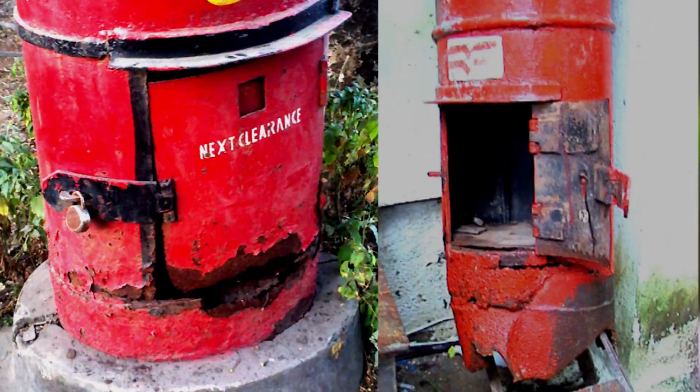The door was dangling. People would post letters and you would see a lot of letters from the outside. And I was saying, can't we just change one product in the country, having so many means in IIT? So we took this as a cause. So that's what we're coming down to. You take as a cause that you need to solve this problem and you have all the wherewithal to do this. So designing a maintenance-free post box became the single line brief.

So how this line brief came is very important. We also thought of doing this project. Who do I have to go to? The India Post, and then I requested one of my students to take this as a project. Luckily, one student agreed. He said, I'd like to do this project. The Postmaster General in Bombay also was very, very happy, and to his everlasting credit, he gave this one-line brief: maintenance-free letterbox. And you'll see how this is very important for the whole design journey.

So then from our side, the trigger was very critical. I had a concern for the post. I had the empathy for the user. The letters are getting spoiled and dirty. There was a strong urge to make a difference. Like, we're all designers here, can't we do one small product for the country? And then the conscience of the designer saying that usability and product features have to be very critical. So can't we change this? And generally designers have this dream that I need to do a product which will be seen all over the country. So it's part of that motive also.

So then comes our next thing. First the cause we've taken up. Now the context. Very, very challenging context. Look at the number of letters the people are sorting there. These letters are in the GPO, the General Post Office in Bombay, where they are sorting them for different regions. They are very skilled. They actually throw these letters and they just fall in the right bins, and then you sort them and take them out.

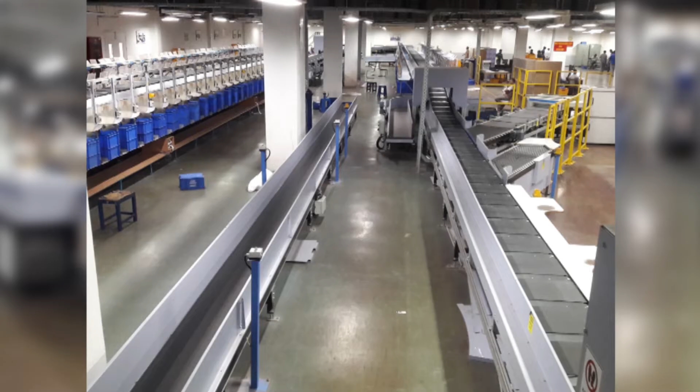While this is happening, they have a high-tech sorting machine too, which is an automatic machine which finishes off all the sorting with infrared coding. So in this context, there is this area which is manual sorting for letters which can't be infrared coded, and there is this high-tech machine which they bought for crores of rupees which does the sorting for most of the other letters which are infrared coded. So we have a dichotomy. There is a whole canvas from low-tech to very high-tech.

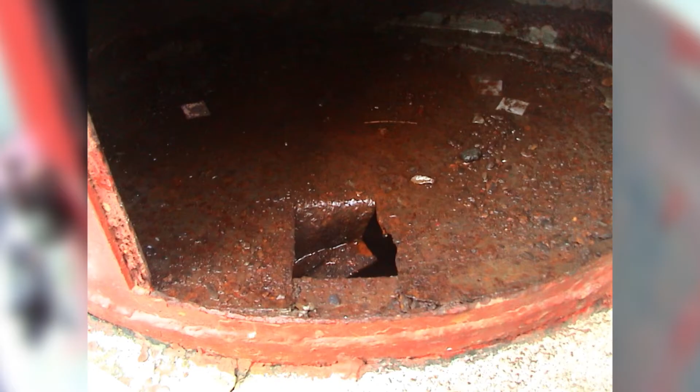And even the installation processes are very, very tough. So your installation costs are very high, the painting costs and the maintenance is very, very costly. So that also has very important bearing. And water ingress, look at this very ingenious postman. He actually put a gunny bag inside so that the letters don't get wet, because there's water on the floor. Look at the other person where he's put a small hole over there so the water goes and stays there rather than stay in the box. So these are all the conditions of the post boxes.

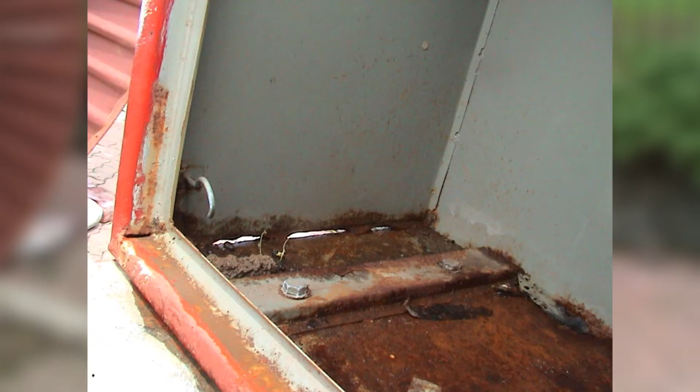And look at the manufacturing defects. Can you see that edge which is open on the side? So how do you manufacture? What are the details which you use for manufacture? So manufacturing plays a very vital role. So from each of these insights, we're getting new aspects.

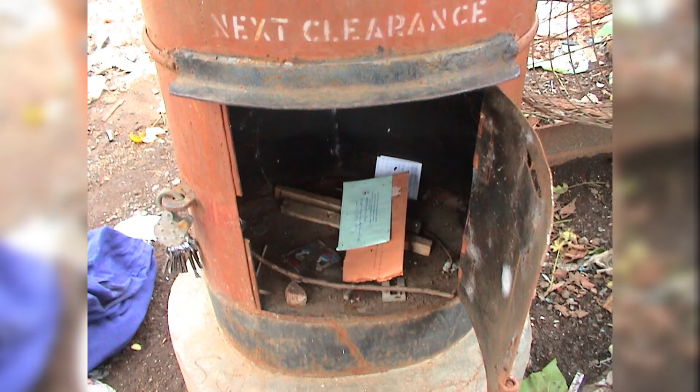And look at this again. Because the bottom is getting wet, the postman put a lot of sticks and wood so that when the letter falls, it falls on those sticks so that the letters don't get wet. And look at the other problem. People putting cigarettes and stones inside. How do you prevent that? You can prevent all this.

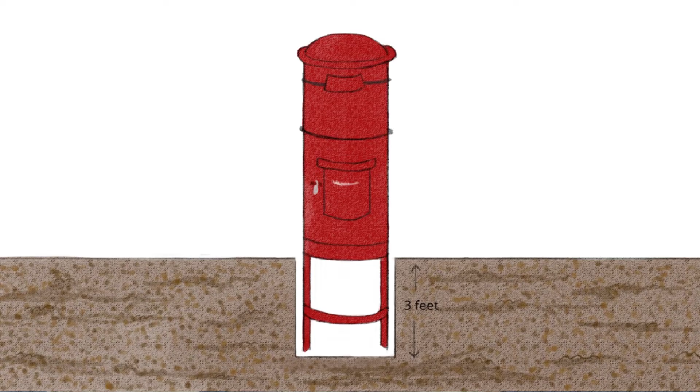Okay, and then look at the keys. You've got 10 keys and he's fiddling with the keys to open. So we need to reduce the number of keys if possible. You can have a common key. So most of the check is coming from your study.

And then he has to place the timeline, at what time he's clearing the letters and what is the next clearance tag. If he's cleared the letters at 3 o'clock, then he would come again at 3 next day. He has to say 3 next day, or he has to say 6 o'clock in the evening. So those clearance tags go into the post box. So we study those tags too.

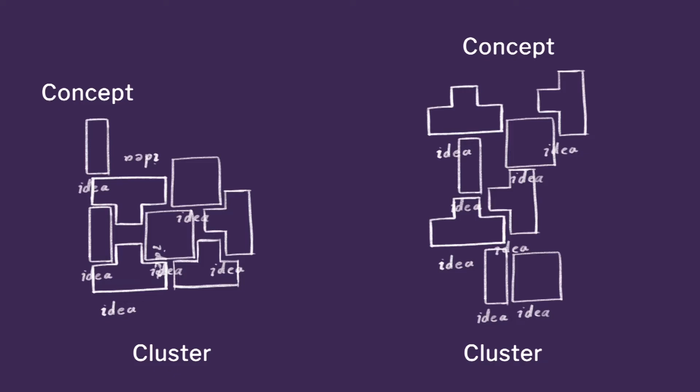So let us now go to the most important aspect of the lecture, which is the creation, the conception, where we're trying to conceive multiple ideas. We group them into affinity clusters. We'll explain each of these terms to you one by one. We create at least 3 concepts for every project we have. 3 concepts are a must, and then we select the final design. So in this sequence, when you have multiple ideas and make affinity clusters, you have around 30 ideas in each cluster. Then when you make concepts, you have one assimilated concept, and then you design. So this is a very interesting journey.

This needs specialized training. So now I've put up this slide specifically for you, and you can see that there are multiple ideas for each problem, but I'm only showing you 1 or 2 ideas for each problem. You can actually have 10 ideas for each problem, and that's what we encourage generally. But here, for paucity of time and slides, I'm showing you 1 idea for 1 problem.

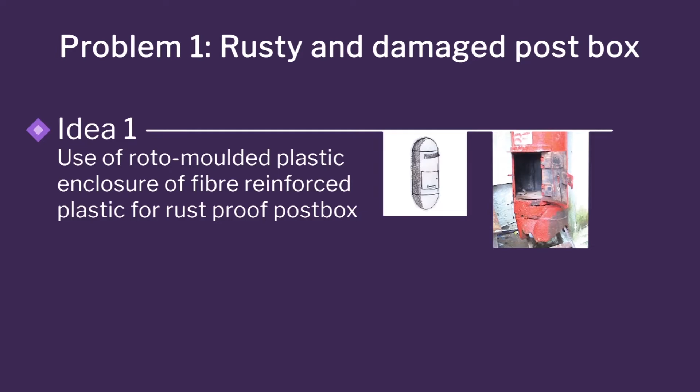Now, for example, you have these rusty and damaged boxes in this slide. So what's happening over here? Because of mild steel, it is rusting. So the best option is to use plastics which don't rust. And plastics have round shapes. So that's idea number 1: rounded shapes, no water ingress. Number 2 is use stainless steel. Stainless steel doesn't rust. And then you have flat boxes for stainless steel. Very simple, straightforward ideas. But they're only solving one issue about rusting of damaged boxes.

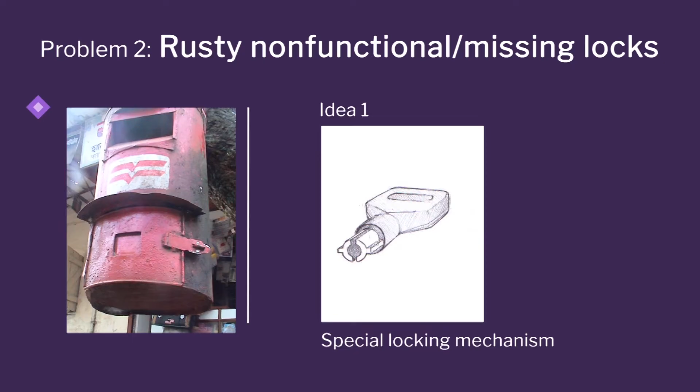Okay, now go to the next one. Rusty and non-functional locks. How do you look at rusty and non-functional locks? So in this slide, you're seeing how you can think of interesting ways of locking by using a special lock, so that the postman can carry one single key, and he can go everywhere and use the same key rather than using a padlock or a lock.

In this, the seepage of water is a serious problem, and the seepage of water happens because of stagnation of water on the tops and edges which are not closed. So you're coming up with designs which have rounded tops, like tapering houses, so you don't have any water seepage inside.

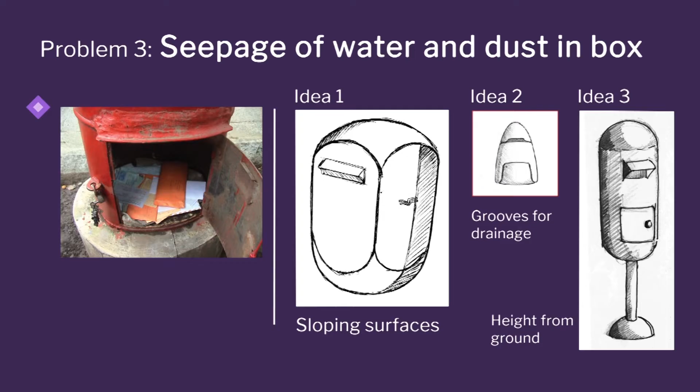Then you have seepage of water, again another idea where you make up for the dust in the box. So this idea is for the dust. Look at that post box which is fully muddy and now water is going in. So you need to put it up on a pedestal. You're not doing something new. Your ideas are not original, but you're imbibing some of the learnings from other places. So I know that if there's a lot of dust and muck, I need to have a pedestal for storing.

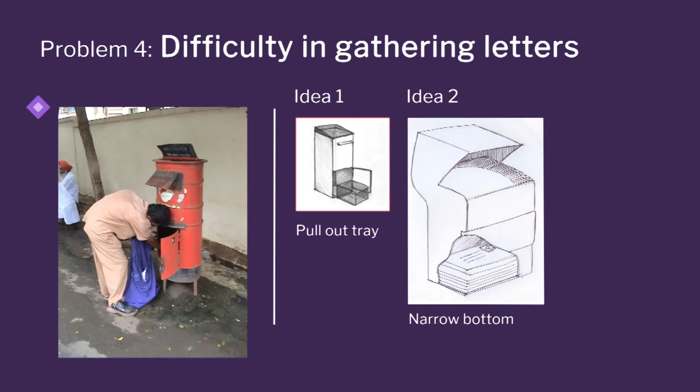The difficulty in gathering letters, what are you doing? You can have a tray inside and put it in your bag, or you can have letters stacked inside. This idea is coming from the check collection boxes. The check collection boxes have a very narrow box. So when you put the check envelope inside, it just sits already stacked. This is not possible in our case, but all ideas are welcome when you're doing ideas. So this is inspired from check collection boxes.

Cumbersome and time consuming installation. You looked at those earlier boxes which had these large cages which went into the soil. So you have to dig the soil, you have to put concrete inside, and you have to assemble them. It was bad for rusting. So here you come up with better ideas, where you mount them on walls, or you put them on concrete platforms where you just bolt them to the platform.

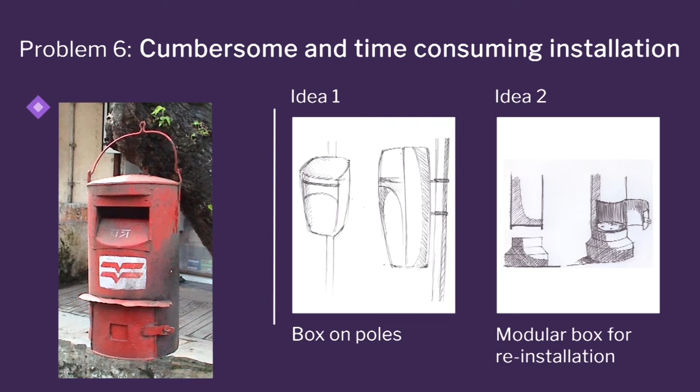These are not new. These are all coming from lamp posts and the street lights. You see, all of them are bolted. So you can use a concrete structure and bolt your post box, so that in case there's a problem, you can open it up and bolt it elsewhere. So there's an ease of moving the box.

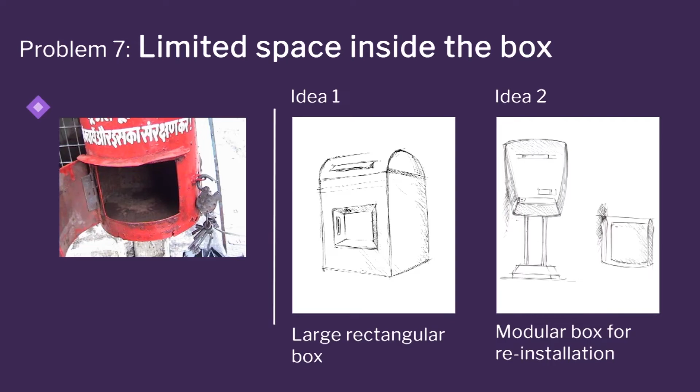And then if there is a large volume in post boxes during festivals, there are 2 options here. You have an add-on box, or you make the box itself large. Look at the large box, square box. So you can have different ideas for different requirements. Again, we're looking at modular design. You can have a small box and a big box, as shown in this slide, where you have 2 designs. And today also we have 2 designs in our country. We have those small boxes which are in all the district headquarters and most of the villages.

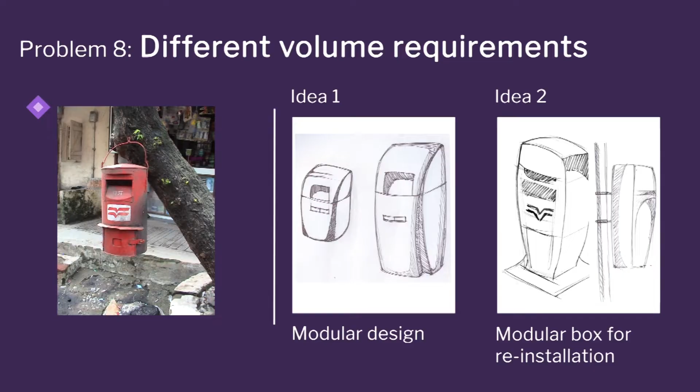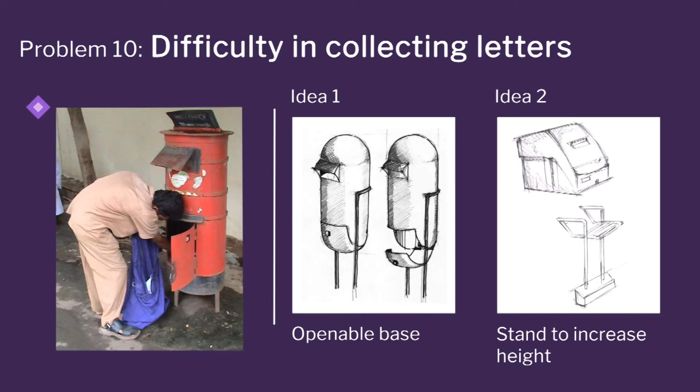And then difficulty in bending and collecting letters. This is my favorite. In this design, the post box opens from the bottom. So what happens? You put your bag below and all the letters empty into the bag. Isn't that very interesting? So you can have a design where you don't need to take the letters and put them in your bag. You put your bag below and open the door and all of them come down. So that's a very good idea. Or put it on a pedestal so that you can collect the letters more easily.

Poor maintenance makes the box look dirty. So what do you do for maintenance? Have surfaces which are clean. Posters on the letterbox. How do you prevent this from happening? Actually you can ward this off by yourself suggesting advertising. So you put advertisement. The person who is putting the advertisement will protect his advertisement so that nobody else will put posters. Or you make it difficult for people to stick by making the surface such that you can peel it off. Because every day the postman is going to collect letters, so he can maintain the box. He can actually peel it off. So you have to have a surface which is easy to peel off.

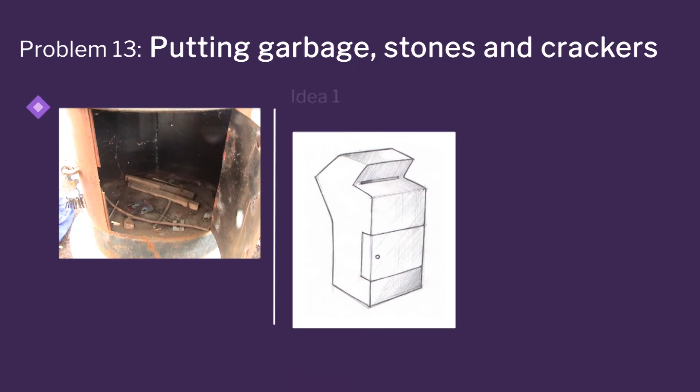So those are the two ideas which we came up with. And then putting garbage and stones and crackers for fun. There was a very interesting case where we studied that, because it makes a good sound, before and during Diwali people put bombs inside so that the sound is very good. The posting slot was so convenient to put a bomb inside.

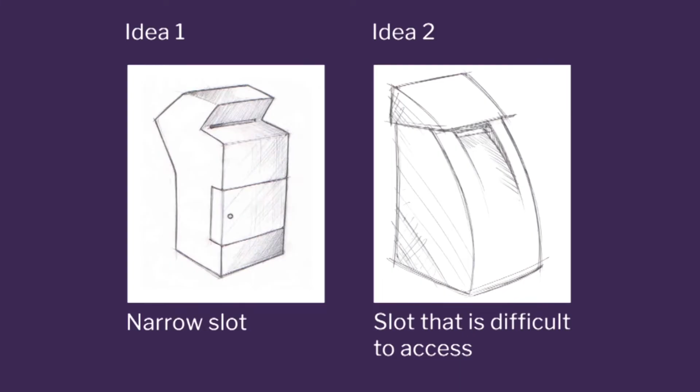So what does design do for us? You make the posting slot such that you can't light the bomb and put it inside. So how do you narrow the entry so that stones and things can't go in, only the letters can go in. And the bottom idea is for areas where you are not able to put a bomb inside because it's got to travel inside and then fall inside. So it's very difficult to make the bomb travel inside. There's a flap inside, it can't go in. So you can think of ideas for ingress.

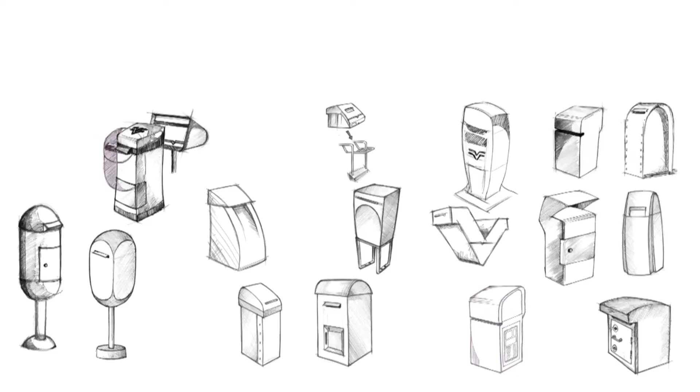So can you imagine how challenging it is when you generate ideas for all the problems you saw in the field? And whether it is possible to implement all this in the final design is a bigger challenge which we will discuss. We have a very interesting method where you actually bunch the ideas with an affinity. This can happen in any of your projects too. If you have a lot of ideas, you put them together, and the ones you put together are because of affinity to each other. And this is a card sorting method where you use cards. And it is based on the objective of the project.

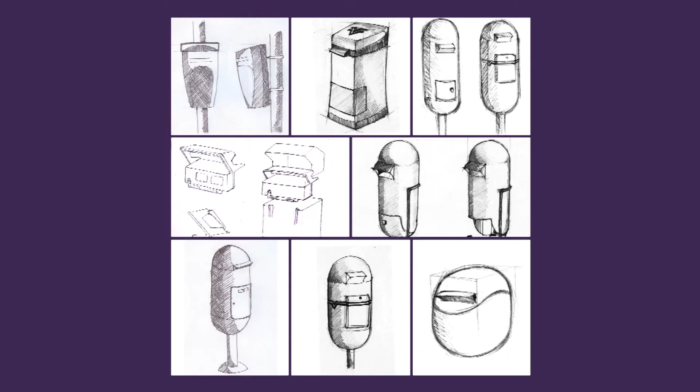What is the objective of our project? The one line brief: maintenance free. So maintenance free was the objective. How do you achieve maintenance free? Generally, by having good manufacturing and good materials. So your clusters will be based on material properties and manufacturing properties. In this case, the type of material and the method of manufacture was used as the basis for the grouping. And we also found out that the prime criterion for grouping is that we satisfy all the aspects of the brief. So you put a lot of interesting ideas together.

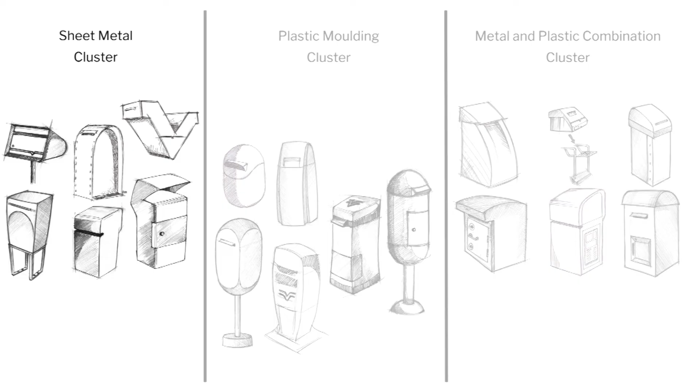So let us now see how the grouping happens. All the ideas were there. We had some 100 ideas. What's the method of doing this sorting? You have to make small cards of all the ideas. There's no other method, unfortunately. You make 3 groups, and you start allotting these ideas. So I'm just showing you one small cluster. This is called the sheet metal cluster. Why is it called the sheet metal cluster? It's got flat surfaces. It is amenable to designing in sheet metal. So this was one cluster which we generated.

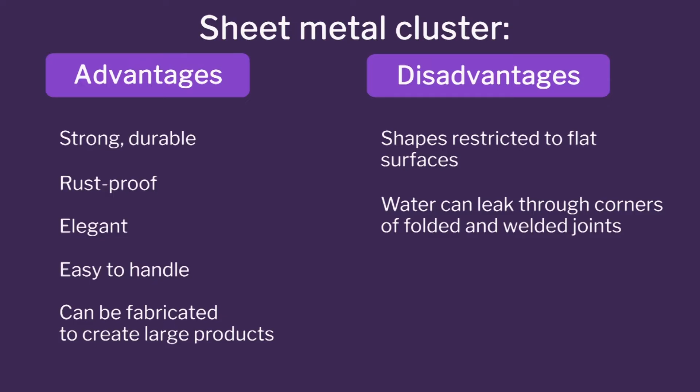And in the sheet metal cluster, what are the advantages and disadvantages? This cluster, for example, gives you a product that is very strong. It is durable. It can be rust proof. You can also make it elegant because of the large surfaces. It's easy to handle because it's lightweight, and it can be fabricated in large numbers. What are the disadvantages? It has restricted shapes. It has to be always flat because you can't have that type of tooling. It also has the possibility of leaking through joints, which was the serious problem for our earlier boxes. So leakage of water could be a potential problem, and it will have welded joints which could be really problematic.

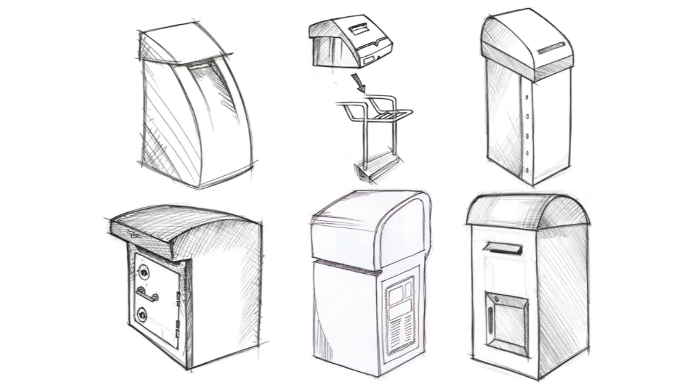And look at this cluster, which is the plastic molding cluster. You see all of them are rounded because it's molded. It's made out of plastic, so there's less rusting on the box, and it also has very interesting shapes. But I see some little difference. There's one in the center which doesn't really match the cluster very well, but it has been put in this cluster. There's no hard and fast rule. Maybe the designer thought we could use plastic molding for this purpose. So that's why he put it into this cluster. So interestingly, the clusters are only giving you creative ideas to go and make concepts. It's not really hard and fast why something should or should not go in.

So here we have the plastic molding cluster. Advantages: it's elegant, it's rust proof, rounded shapes, multiple colors you can mold in. And the disadvantages are, it's not strong. People can hit it with a rock or a stone and it can break, so vandalism.

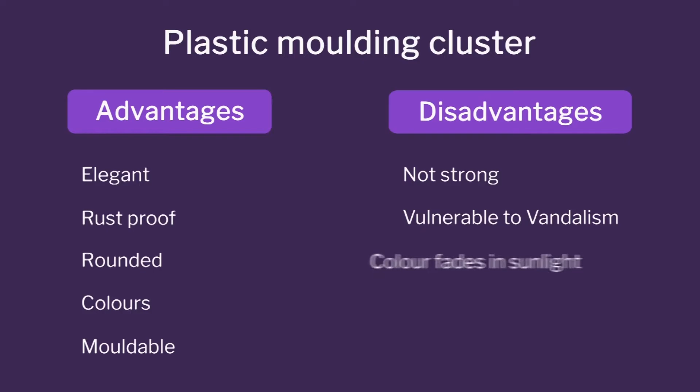And color can fade in the sunlight. And in a product like a national level public product, you can't have things which are made of plastic. So you have to really work out and check how to go about doing all these.

So the next cluster is the combination cluster. You remember all these ideas? So the combination of plastic and metal. So here the top is made out of plastic and the bottom is made out of metal. So you have advantages of both. You have good smooth surface on the top for water to go out. You have all the body which is flat, which can store large letters. So best of both worlds.

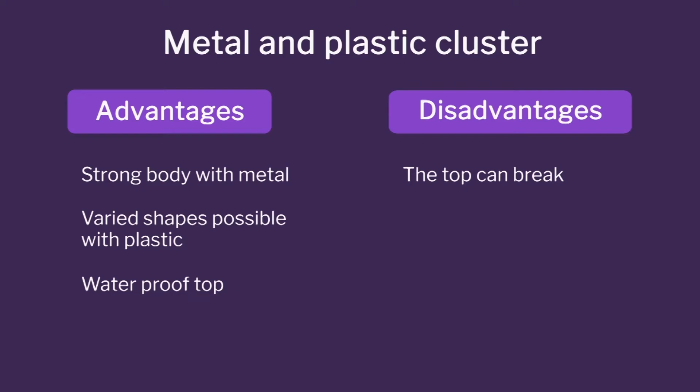So this was a cluster which was a combination, and it used the advantages of both, the metal because of the strong body. But still, if somebody hits on the top, it can break. So you need to work out on materials which are engineering plastics, so the top molded part will not break. You will have very good strong tops design, and the disadvantages can be reduced, and the cost is very high because you have both the plastic and the metal coming up.

And did you remember in the cluster we have ideas for one problem, right? Keys problem, visibility problem, user problem, and all the ideas are put together now. So you need to combine them and make concepts, and you need to at least have 3 concepts. So we'll see how we sort of isolated the solutions and came up with a very rigid structure which we followed.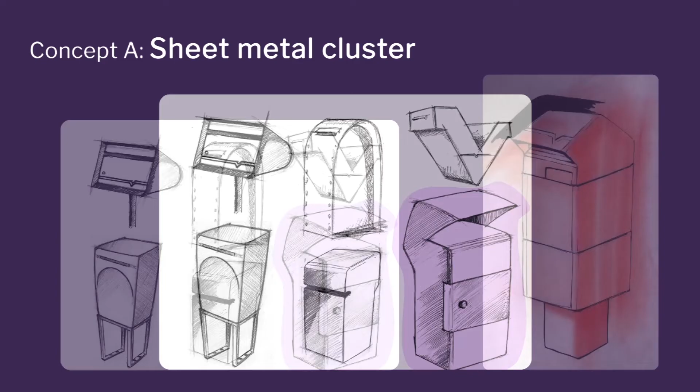So when you have a cluster of ideas, what do you do? So what we do is we generally take one champion idea. I'm just showing you 6 ideas there, and there's one champion on the right, and imbibe all the qualities of the other ideas in the champion. So it totally depends upon the designer's perceptions and how he's going about.

So look at the other idea of those flat surfaces. Look at that half round flat surface. The concept of that second idea was that a flat surface is easy to clean. So what have you done with your box? It's got flat sides, so it's very easy to clean. So it has less problem of rusting as well as corners being dented. So those are the ideas which are borrowed into the main concept. And look at those legs for the second row in the first.

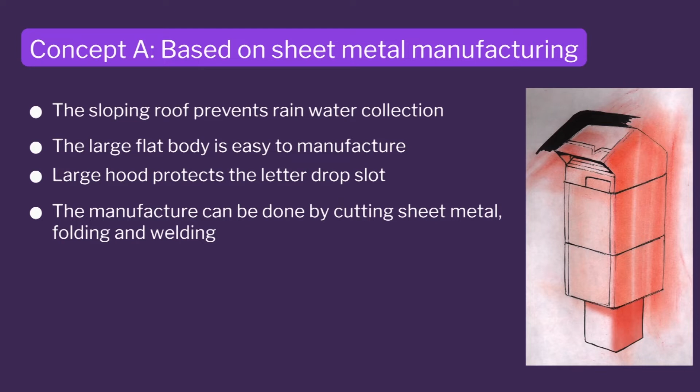And then basic advantages of this particular concept: it has a sloping roof, so water will not stay. It has a large flat body, easy to manufacture. It has a large hood, which helps in protecting the letters when you're dropping the letters inside. The manufacturing can be done by cutting sheet metal or stainless steel and folding them and welding only the corners. So a much better sort of design.

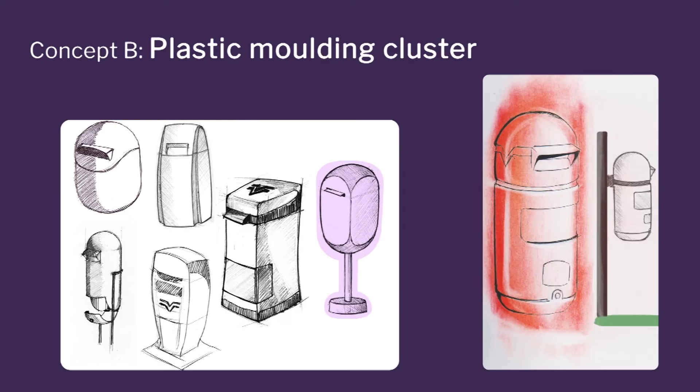Look at the next cluster and the representative. Inspired by all the other aspects, but it's very, very close to the one which is the champion, and there's an opening from the bottom in this design which is still being retained over here.

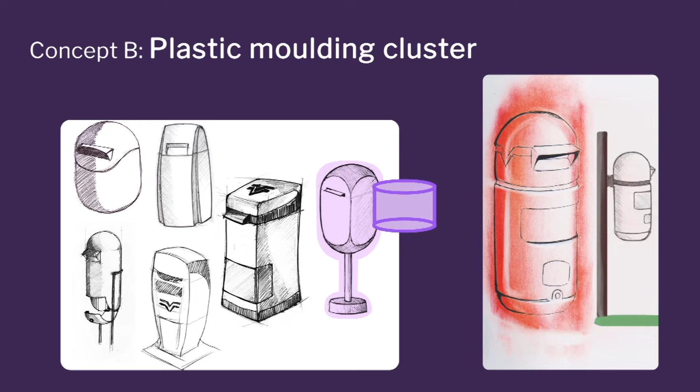Rounded shapes, so no rusting, completely sealed boxes, so letter collection is very convenient from the bottom. It can be manufactured using plastic molding process, and it's very rounded. So it looks very new and innovative. At the same time, it has this issue of vandalism which is not solved in this.

You have a rounded top, inspired by the Diwali bomb feature in the design, where you have a very nice chute inside, so that it's very difficult to put stones or play with it.

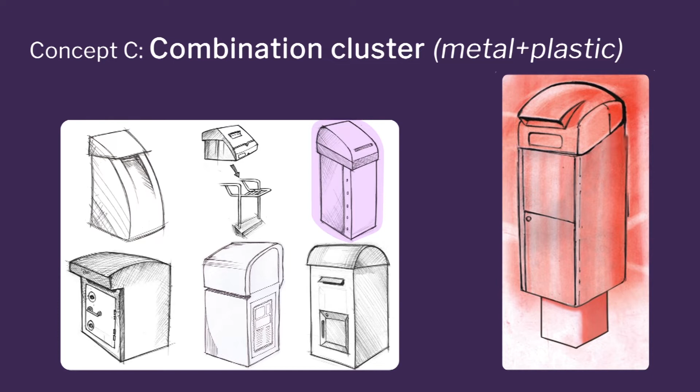And you have a large door. So the whole door opens, all your letters are with you. So a lot of conveniences and advantages. And it is a combination of both A and B, which gives you the combination of advantages. At the same time, the disadvantages reduce because you're half metal and half plastic.

So we have now three concepts, and we have to choose one of them to go forward. And all the three concepts satisfy all the aspects of our brief. The first one also satisfies all the points, but maybe it is not very high on ease of maintenance, but it's very, very high on ease of fabrication, robust manufacturing, aesthetic aspects. All those things are very good.

See, all of them have good user features finally. Large doors or door opening from the bottom. So user convenience is equal in all of them. So you can really look at those checkpoints very carefully to see how we go about doing this. So these three concepts now we pitch against each other. Each concept has its own value, disadvantages and advantages.

And we saw that the last concept was selected basically because it had the advantages of both concept A and concept B, because it was using a metal box, it was using a plastic top to retain the rounded shapes, not let water come in, because when you cap with the plastic all around, there's a chance that there's no water leakage. It had all those issues of making it much more aesthetic, because you can have a top which is more rounded and more contemporary in design and styling, while satisfying all the issues of maintenance.

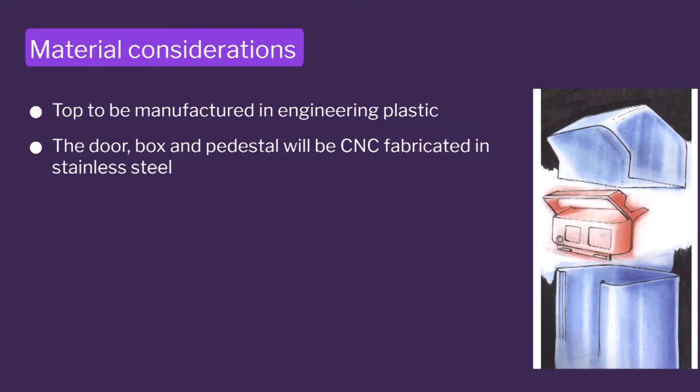Once you've done the concepts, you have to detail them out. How will you manufacture this concept? What would be the shell? What would the top be? What will the frame be? Look at those rough sketches of the designer where he just wrapped around his sheet and got a front panel and fixed it. This is the very first development of the concept.

He said, I'll take inspiration from transistors, TV cabinets, and audio machines. What do transistors have to do with a postbox? Nothing. But you have those in your house. You have them all around you. So you have a perception of what a good style is, or what contemporary products are in the market. For example, today you can't accept a Maruti 800, which was an old design.

At that time we all liked it, but today the style has moved much beyond rounded shapes to new designs which are faceted, the Hondas and new cars which are coming in. So we have this perception in the people. So we need to look at products all around. So we looked at TVs and audio players, and he did this design, and we said this looks a little contemporary.

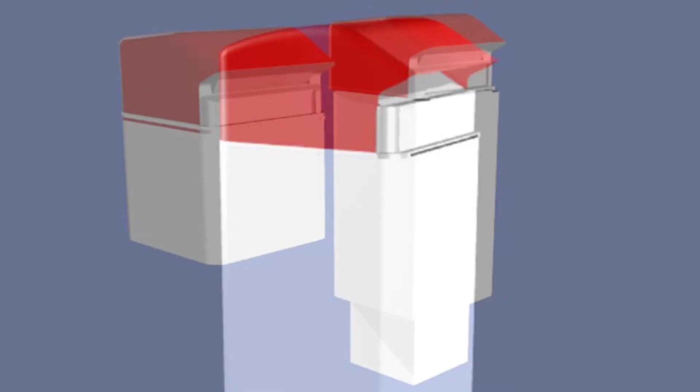So here we are. So finally this narrowed down to large radiuses and flat surfaces. See, the surface is flat on all sides. And this was finally chosen to go ahead with. And then you remember, we are supposed to make two models, the small one and the large one. And this we call the smart top because the product started looking smart and contemporary.

So from here, then you go to what is called the first prototype. So how do you make the first prototype? Will you go to large manufacturing places, or will you go to small manufacturers who are craftsmen? You'll go to small manufacturers who can make one-off kind. So they're generally craftsmen, blacksmiths who do just one product. They'll keep hammering, like how they make utensils.

And then you also have multiple parts for the top, which is made out of plastic. And these multiple parts are very important because you just can't make the whole shell in one go because there are different moving parts. There's a flap which lifts so the letter can go in. So all those are very critical aspects.

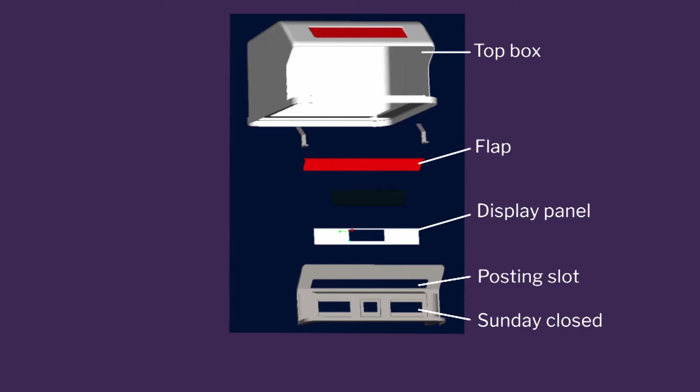So here comes our first prototype, made all by hand. Look at those shining parts which are undulated. They look handmade, right? Because in handmade, there are a lot of stresses in the plastic. And look at the top. The top also is hand done in our vacuum forming machine. The front panel is fabricated using small parts of plastic joined together. And this is a very important technique students in design learn to make a quick prototype or a mock-up model, we can say.

This is a mix of a prototype and mock-up because the bottom section is using stainless steel, which is like a prototype, which is strong, whereas the top, which is supposed to be injection molded, is not one piece. That is like a mock-up because it's got small parts which can break very easily. So this is a mix of both techniques.

And then you use the same top on a larger box. So you have the design which is modular, the small and the large, and this modular design is the very essence of our check, where we said that we need to have two sizes. So from here we have those very important features of our design, which we said we want a prominent front panel. Look at the front panel.

It is telling you when the box is going to be cleared and the information of the address where the post box is located. There's a nice overhang in the bottom, so you could collect the letters much, much more easily by sweeping them inside. And then you have this prototype which is now ready.

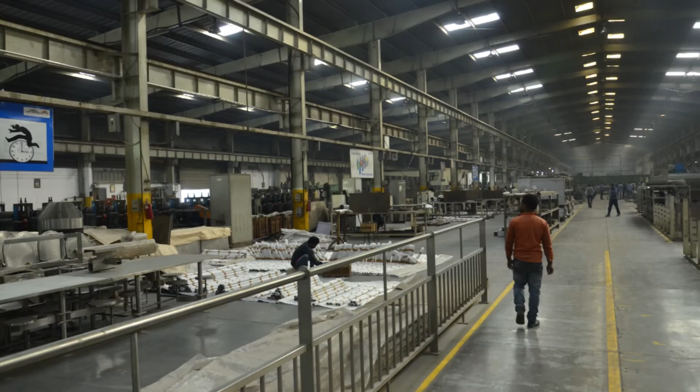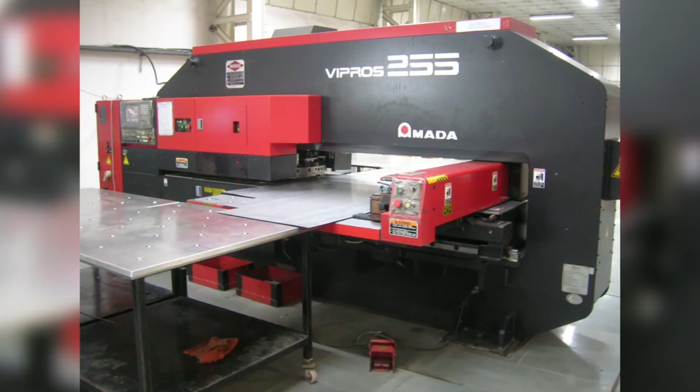Then we ordered stainless steel from the market. You saw the stainless steel which we used for prototypes. They were undulated. They look like hand beaten. But in a pilot production, I need to have very, very high quality surfaces. So we went to Jindal stainless steel, and they gave us one of their best grades of stainless steel, which is called Scotch Brite finish, so that when the headlamps of the car hit that stainless steel, they don't reflect back. And then they also took us to their manufacturing unit, which is called Jindal Architecture, where we produced the components using CNC punching.

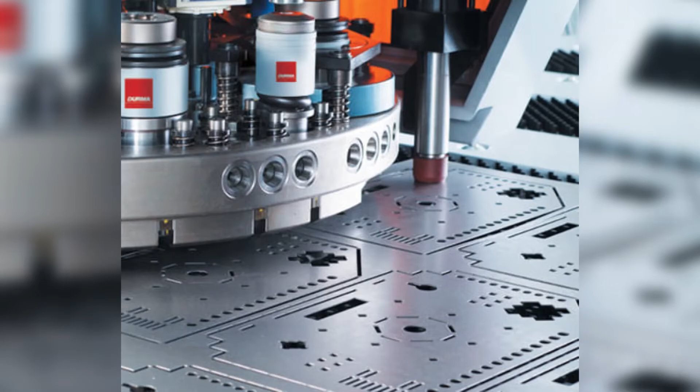What's the advantage of computer numerical punching of a sheet before you fold it? Accurate corners and folds, saving of material, nesting of parts. I don't lose any sheet. I just punch all along and I take all the parts out. Look at the sections which are coming at the end. Every small part I punch and use for some purpose. And I nest my components so that I use all the sheet very effectively, as well as the most important point is that it gives you very accurate parts and very high quality.

And now comes the laser cutting. In CNC, you turret punch and cut the material. In laser, you cut using lasers. What is the difference between the two? Why do you need to use laser sometimes and the punch sometimes in a prototype? I'm doing a pilot production, right? I've got very less quantity. So how many punches will I have? If I have different diameters, if I want to cut a postbox logo on stainless steel. So when you have prototypes, generally you use laser cutting because your volume is less. You can use laser to cut the material, and laser of course gives better edges. Laser also gives you very intricate shapes.

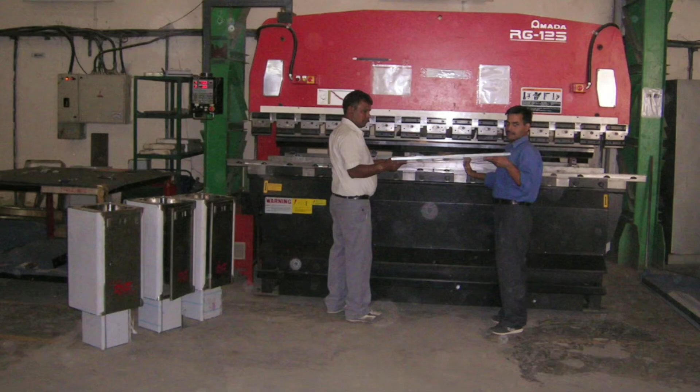And then what is this beautiful machine here? This is computer numerical control bending. Stainless steel is a very, very tough material. Here we have all the inputs coming from our mechanical engineering professors, our professors from manufacturing.

And then you fold inside and weld inside. When you bend and you weld on it, it makes a lot of stress undulation, so your sheet becomes very undulated. Then we have a tough composite top. Glass fiber reinforced plastic is very, very strong. They call it fiber reinforced plastics, FRP. You heard about FRP? They also use FRP to make sculptures.

Then we have this very interesting feature. We put a sliding panel inside for the time, so he doesn't need to take it out. He quickly slides the time and he can go, and you can see the very prominent pin number and the location address. So this was a feature built into the door, and the door is very strong in stainless steel.

And then we had this contemporary look because of the radius. It looked very contemporary, and because of the smart top, it had a look which was very prominent, so it was very easily visible from everywhere. And we had these large surfaces where we could advertise. And then we have all the features built into this. The door is also locking very tight, so you have no insects going inside.

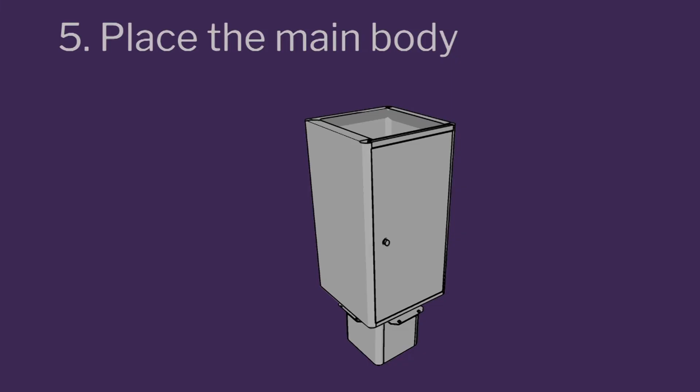Look at number 1. That's how it reaches the customer, who is my post office in a remote location. Number 2, he has to take the base out from the top, keep the base outside. He has to take the top out, assemble the base to the body, assemble the top to the body, and your box is ready.

Tremendous amount of advantage in transportation cost. So half the volume. What did we get by doing half the volume? Tell me. It's a huge cost. We never realized that packaging is a big cost in design. So just see how we're getting into manufacturing, production, packaging in a very, very close way.

And then the best thing happened to us when we got the order for 20 numbers and we said we want to launch all over the country. The principal secretary of the Postal Department approached the minister to launch this box as part of 150 years of India Post existence. So this is the interesting story of how we started with 20 boxes, and to our surprise, as soon as the program happened, everybody knew about the box.

So look at how design can flow. Everybody now knew that there's a new box. So they said, we want at least 200 boxes to begin with. So then we took the challenge again. The challenge was to collaborate with large-scale manufacturers. We again approached Jindal. They produced the best stainless steel for us. They said, no problem, we'll give you low nickel stainless steel, which is cost-effective.

Nickel is the one which gives shine in the stainless steel. So look at what happens. You can even change the metallurgy of the raw material if you are with the manufacturer. So designers have to reach that level if you have to have a successful product, that you change the metallurgical composition of your sheet which is produced so that you can have cost-effective products. So stainless steel sheet was produced at the Jindal factory.

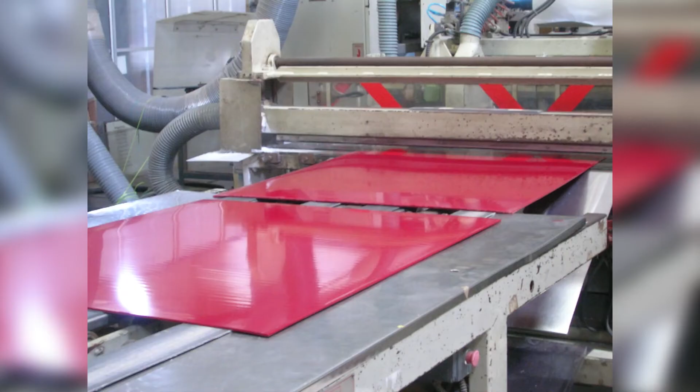Then we had GE Plastics, which is the largest plastics company in the world. We had already had 20 boxes all over the country. So people started recognizing us. They came back and said, we will help you produce the engineering plastic. So look at that engineering plastic we produced. GE has a big plant in China. And I wanted red color because post office red is a very important color.

So they did polymer processing in China, brought the granules to India, did the extrusion. Look at that extrusion machine in the bottom. Extruded the sheet in Ahmedabad and vacuum formed the sheet also in another company in Ahmedabad and helped us develop the top of the box. So now we are using engineering plastics, but you're using vacuum forming tools which are low cost.

So from there, then we went to Godrej. The CEO of Locks division came to us and said, Professor Chakravarti, we'd like to be part of this project. Now look at this beauty. People are coming on their own and saying we want to be part of this project, and we could get the best locks, Godrej locks, onto the post box, which are non-rusting locks. Then again CNC manufacturing happened from Jindal Architecture.

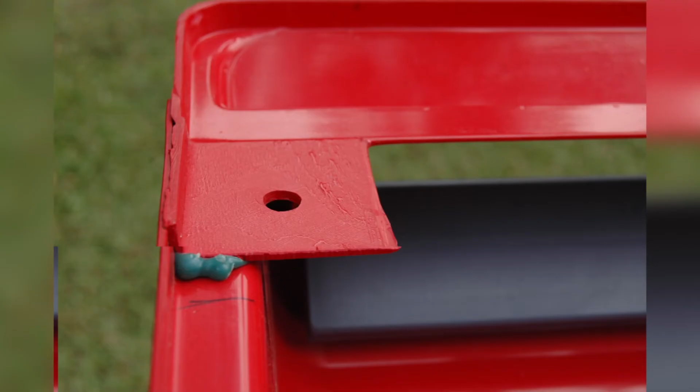Then a very interesting problem we were facing. Our vacuum formed plastic parts are different parts. You need to adhesively bond them. And I was always very skeptical that adhesives will fall off. How many of you know that the aircraft wings are stuck with adhesives? So today there's so much technology in adhesives that you can actually have the adhesive stronger than the virgin material. So if I stick a plastic and a metal, my adhesive will not come off, but the plastic will break because metal is stronger. So we have adhesives of that quality.

So we went to the best adhesive manufacturer called Huntsman, who make adhesives. They were in Hyderabad, and we produce the adhesives which will join these plastic parts so that the box is integral and nobody can come and whack away the top.

And then we are supposed to bolt this box in the floor, right? So for bolting the box in the floor, we went to the best anchor bolts, Hilti, which produces these bolts which are drilled into the floor. And then they got different types of bolts. They suggested a bolt which we should use is called chemical bolts. So it releases a chemical and locks in the floor. You have a concrete floor, you can lock these bolts inside and bolt your box on top of it. So you can take out the box whenever you want. So they got the best anchor bolts in this. So we had an all-round process.

And what are these small models doing here? You can see my computer and see the model. Promotion, marketing and promotion is a very, very important component of design. Now everybody, we launched during the event, so we made 200 of these boxes. Your miniature should be better than the original, right? It can't be like a Khilona. It has to be very good.

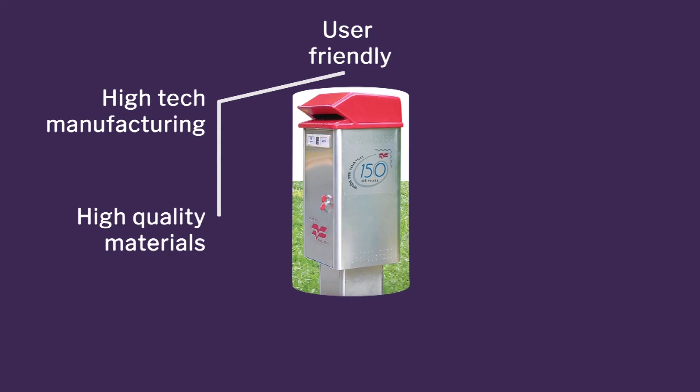And then here we see how we went ahead with collaborative innovation of user-friendly design. We use very high-tech manufacturing. We have high-quality materials. Every material used is high quality and contemporary. Then we also made conveniences for everyone. The user, the people who are collecting the letters, as well as the people who are installing the post boxes, as well as people who are carrying the post boxes to the locations. So we considered all our users, from the primary user to the secondary user to the tertiary user.

We have a very, very elegant and modern look, and it's also revenue generating, because if you put advertisements, your cost of the box can come back to you in 2 years. So this was a very interesting case study where we could do all the aspects very effectively in the design. And then we reached now the second valley of death.

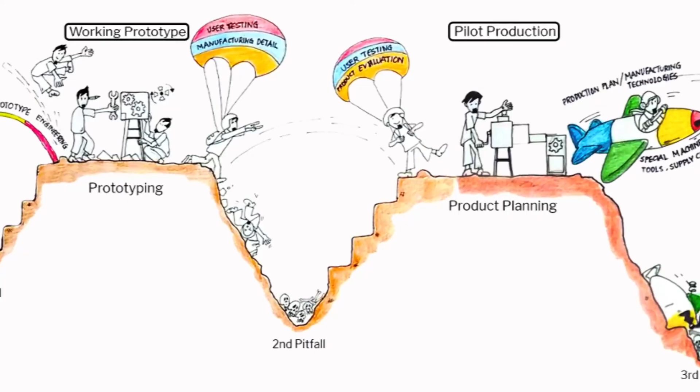So I'll show you this intricate journey of how your product can fail, and once the product fails, how getting back on track is extremely difficult, and what are the very important aspects we must consider so that we don't reach that stage of failure.

So I would again like to take you back to our 7 concerns of innovation, especially showcasing these 7 concerns from the point of view of aspects of the post box itself. So like I was mentioning to you, we're going to check up the 7 concerns of innovation by design. We checked that we stood for a cause, where we said we will look at the rusting post boxes, change the design so that it's convenient for the users.

We can make it with better materials, and also make it more comfortable for installation, as well as good for the postman to collect the letters, and for the end user to post the letters. So multiple levels of problems we identified, and we solved all that.

So we also went and understood the context: who actually is the one collecting the letters, what are his problems, who is posting the letters, what are the scenarios around, what are the problems in installation of post boxes when there are muddy areas as well as concrete surfaces. We also looked at other aspects of posts: how they collect letters, how many letters are coming nowadays, are the letters completely personal or business letters.

So we understood the whole context, and then we went ahead and checked the understanding of both the context and the cause, and found out the current key aspects: this post box, we have to very clearly understand that it should not rust. There is a lot of lack of maintenance and outdated manufacturing process. These are the key comprehensive points which came up.

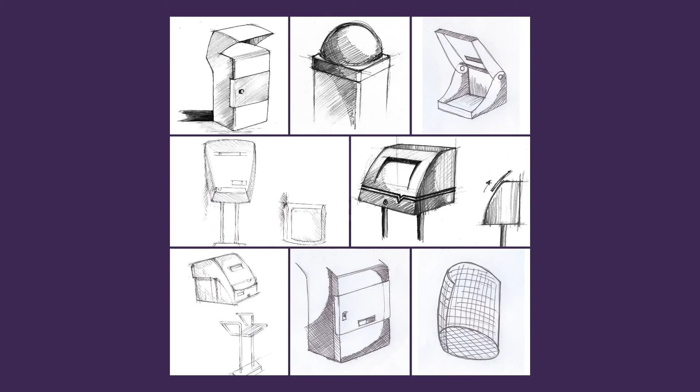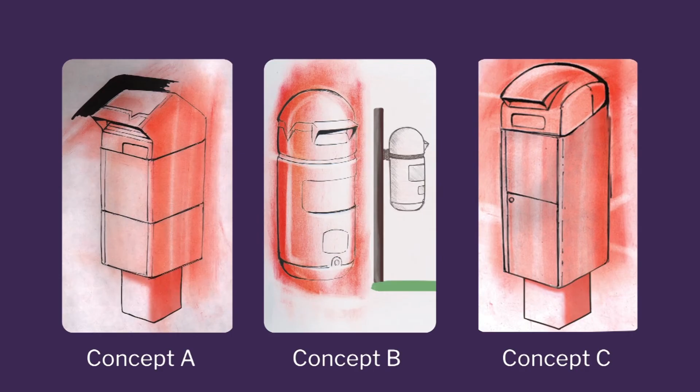So then we came up with these ideas, very clear how we amalgamated ideas and came up with concepts. And then how we chose the final concept and took it to manufacturing. As we discussed the 7 C's, we came to the last C where we made a connection with the users.

We manufactured 20 numbers and had them in the field, and we found out that the users, who were the large number of users, had this problem. So we went back to square one. So in this journey, we went back in the design process to see how we can redesign and take it forward.

So let me again recap with you some of the details. That was the first prototype made at IDC, fabricated in plastics, and the sheet metal fabrication was done outside.

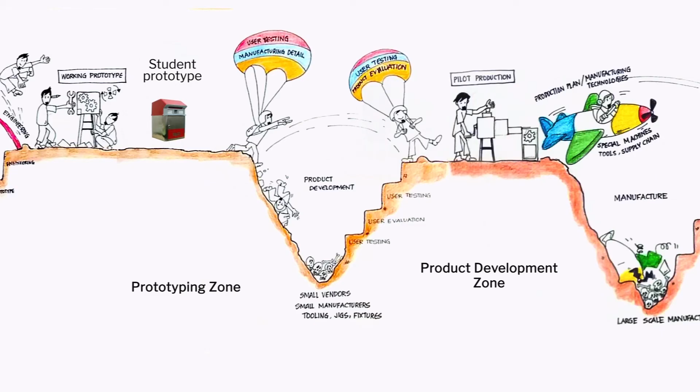Then where do we stand when the first prototype is done in our design process? We are in the very, very early stage of our design. We just reached prototyping. Even in prototyping, you have 2 types of prototypes where you mimic some materials, like for example, the top plastic was fabricated, the bottom was rigid. So that was the design which I showed you.

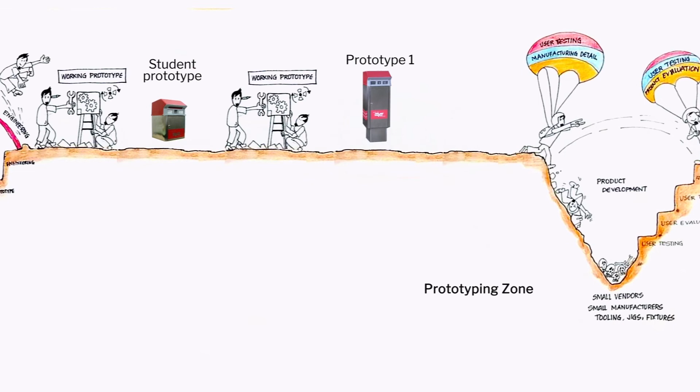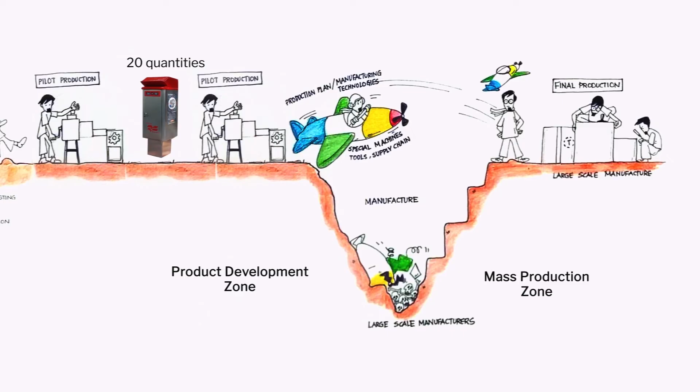And from prototyping, we went ahead and wanted to produce how many numbers? 20 numbers. So there's a mini pilot production. So as soon as we come from the prototype to production, you saw that the prototype had this very large fascia. The prototype was designed for what purpose, tell me? It was for large scale implementation. 2 lakh pieces, 2000 pieces.

But when you get an order for 20, you will not have money for the tooling. Any plastic component needs injection molding tooling. So for injection molding tooling, you don't have the money. So you need to redesign the product so that you can make 20. So how did we redesign? We studied where the problems are. Then we said we will use this special composite hand molding process. So composites are very interesting. You come with resin and glass fiber, and I'll show you how we did that.

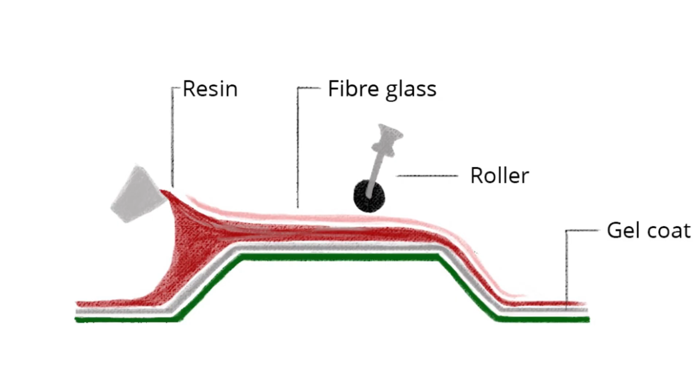So we went back to conceptual stage. We made a plaster mock-up. Then we studied what type of opening we should have. While doing all this, we were very focused on our process. They said the slope should be there, the water ingress should not be there, the top should be integral. So using all that now, the process is seen over there.

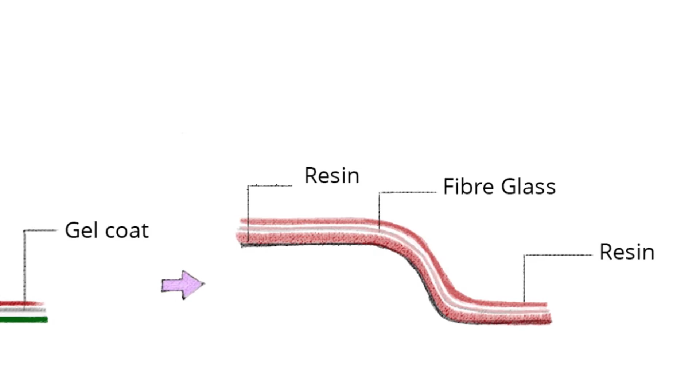We use a very simple composite fiber reinforced plastics where you put a resin, where you put a glass fiber, then you put a resin in a mold. And then when you take this out, it becomes like a rigid product. So I have one sample for you here. So this is made out of composites. So, this is all done by hand. You have a die, which is a negative cavity. So in the die, you do the resins and you develop the whole process. So this we did, and we took this forward.

The person who makes the fiber reinforced plastic top understands what type of shape I'm looking at. So from here, we made this top, and here you can see the top installed on one of the boxes, as well as the top which can go on both of them. So what have we changed? We just changed the very intricate top with a plastic front, plastic top, 3 parts into 1 part, which is done through fiber reinforced plastics. And when you have small volume manufacturing, you need this.

See, we had to go back in our design because we need to produce 20, because pilot is very important to study what happens. Then, this composite top, interestingly, is much, much stronger. It's very tough because it is fiber reinforced, and it did the purpose very well. And we produced our 20 numbers, with all the good features of easy posting slots, very large surfaces for advertising. It had a very critical and important aspect of a common key everywhere, and you had the time sliders.

And you had this very interesting beak-shaped design, and nobody needs to be told to go and post a letter there. So this is called user intuition. So when you have a slot like that, you would automatically put the letter over there. You don't need to specify that. And this was inspired, in analogies, by the beak of a bird. And at the same time, it has got all the protection from the rain, the sun, and all those aspects have been considered.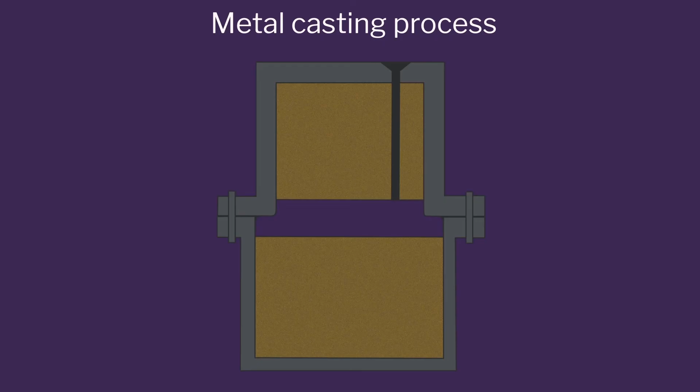We tried an aluminum casting too, because now I had to produce 200 numbers, and casting is a very good process to produce 200 numbers. Again, batch production, very convenient. We tried this and we found it very expensive. We also found it very heavy. So we didn't go ahead with this idea. This is the sand casting process where you make a mold and then you pour molten aluminium and then you get your one piece top.

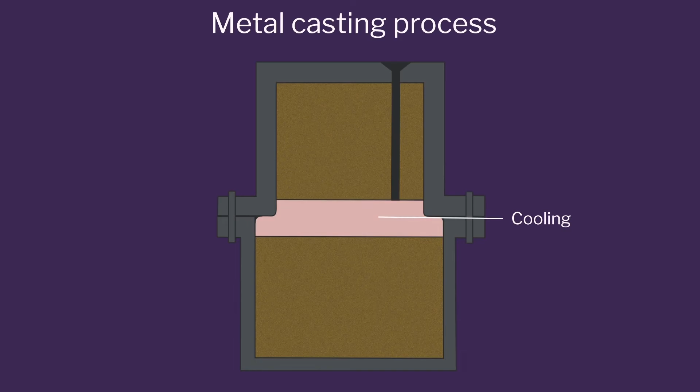And then we said, let me try a next technique of low-cost tooling called vacuum thermoforming. So what is this process? You have a sheet of plastic, you heat it to the temperatures where it becomes like a cloth, and you wrap it around the mold by vacuum. So you have the surface and you suck the air out of the surface, it sticks to the surface of the die, and that is how the forming is done. In the cavity also you suck, it adheres to the cavity and you get this tray. So we used the same technique to make the next level.

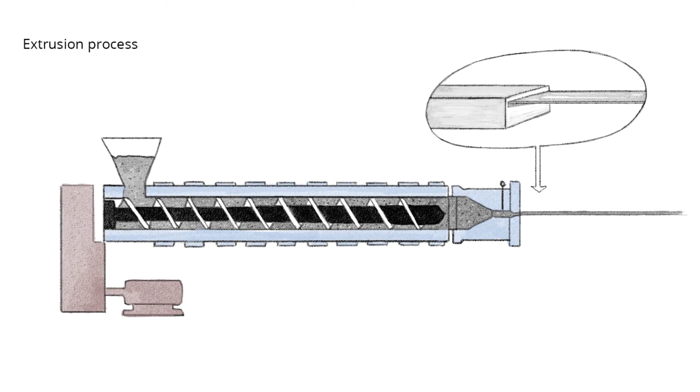So in this process, we had to go and get the raw material also. Luckily, we were happy that GE Plastics collaborated. So we got these granules. The plastic is made in the form of granules, and we made sheet out of those granules by extrusion. What is the extrusion process? You heat the granules and you extrude out of a thin slit and you get these slabs of plastic. So we extruded the sheet. Why do we need to extrude the sheet? Because nobody has this red color.

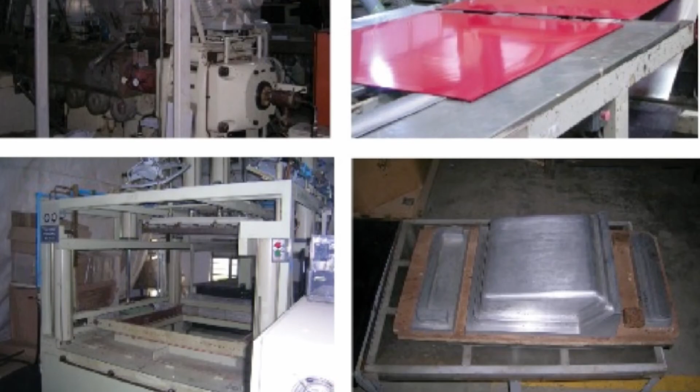We had to get the granules, we had to extrude the sheet on our own, and then we made these dies, the 3-part die, and finally you cut all the parts together and we joined it using the best adhesives from Huntsman, who make it really stronger than the virgin material. Today adhesives are very, very high tech. You have very good adhesives in the market which are as good as the original material. And then we have now the composite thermoforming top, lightweight, formed out of 3 parts. This is one part, this is the front part, and this is the flap which goes in. And this again was very mass manufacturable to a level of 200 numbers.

So, again, see, the whole business when you come to large volumes like 200 numbers is cost. What type of tooling cost and what type of production cost. And because we are working with the government, it was very difficult for us to convince them: please give me an upfront tooling cost and then give me the production cost. They can't do that. So they said, no, you said that the post box is going to cost 8,000 rupees. We can't give you more than that. So we had to work out innovative ways of pilot production for making the top. You can see one of the boxes sporting the top. So here we have the tops ready.

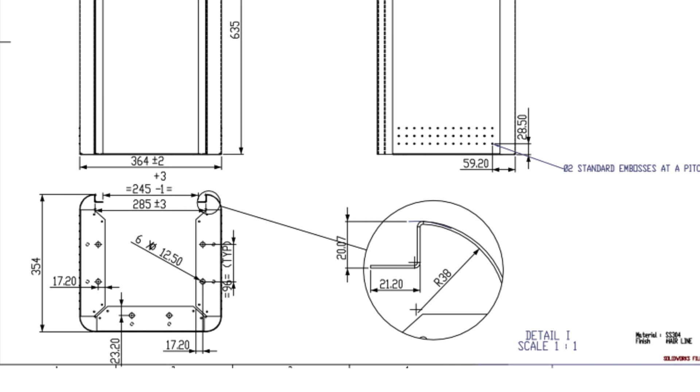Then we made all the drawings ready. You can see how engineering drawings are made with all the details. And this is the assembly drawing. This is the drawing of the base. You see the small indentations to make the stainless steel very strong, and how the whole situation was taken forward, and then how the fabrication drawing was made.

And remember, I was talking about embossing on the post box to make it very strong. So we reduced the cost by 3,000 rupees by reducing the thickness of the stainless steel. So what we did was we used this work hardening property by doing constant bending. The stainless steel edge, the corner which was the most important, became very strong, and we reduced the thickness of the stainless steel sheet from 1.6 millimeters to 1.2 millimeters and saved around 3 kilos of stainless steel.

We have these embossings which make the surface very strong. So we use the embossing, we use the bending and made the product very, very strong. So from these we went ahead and went for pilot production.

See how through laser you can cut very intricate shapes for your profiles. This is where you can get all the rounds, the rectangular cuts, and you can take it for fabrication where you get flat sheets. You take the flat sheets to this machine to do the bending. What is very interesting about the CNC bending operation is that it is very, very intricate and very accurate.

Stainless steel has a property of spring back. If you bend 90 degrees, finally you will land up with some 87 or 86. So this machine has the capability, a computer, to calculate the material properties of stainless steel. You can feed in the grade, 304, and it will bend exactly 90 degrees. It has that capability of calculating and bending.

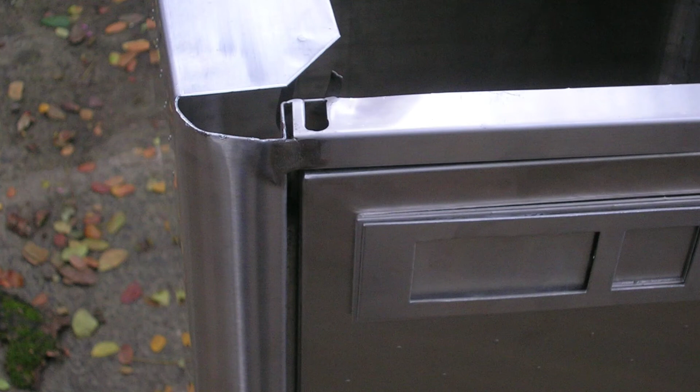And I also told you that to get this radius, we had 22 strokes. So it did the 22 strokes on the machine to get this radius. So by 22 strokes, what do I get? I get more strength, more rigidity. And where do I need strength and rigidity? On the corners. Those are the areas where damage can occur. That also I found from the factory. That's why a factory visit and understanding materials is very, very important.

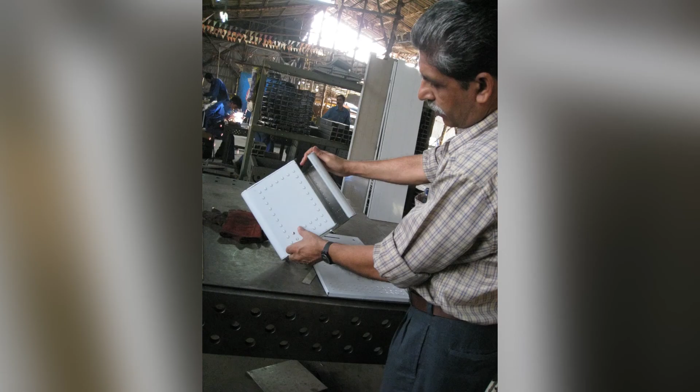So it was fabricated. Then we had this interesting process of getting the raw material manufactured. We got this Scotch-Brite finish, you can see this dull finish, manufactured by Jindal Stainless Steel. Then we got the plastic, as I showed you, manufactured by GE Plastics, specially tailor-made for us. Then we made these rust-proof locks from Godrej, because during our survey we found out the locks were rusting. Then we went for CNC manufacturing, very high quality manufacturing, again with Jindal Architecture.

Then, as I told you earlier, we got the best adhesives so that there's no chance these things will open up in the field, because they have to be really strong. And when you bolt it to the floor, there's a lot of technology in bolting, where you use anchor bolts for bolting the box to the floor. Expansion anchor bolts are a very large technology. So we went to the best companies to get this done. And then we implemented the 200 numbers.

It was a great experience to see the whole factory full of these boxes in Jindal. I was in the factory. We had quality control from IDC, so our staff flew to Delhi, checking whether the quality was right and all the systems were working properly. Finally we dispatched 200 numbers to different parts of the country. It was installed all over the country, from Jammu and Kashmir to Kanyakumari to Guwahati, and we waited for the results.

India Post is a government organization, a ministry, so very sensitive to feedback. They said first we will install 20 in all these locations, get feedback, and after feedback we'll put a tender for a larger order and it will go into the market. Very logical. We were also pretty happy because the first 20 gave us very good results. The first 20 were put up in different locations: Mumbai, Delhi, Patna and Chennai.

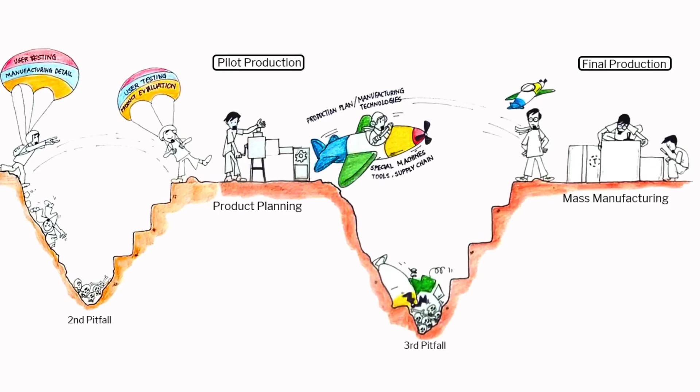So we fell flat on our face. Then they said redesign the same materials and good manufacturing, CNC and all, using a round shape. And all other features were appreciated. Everything else is good. It's excellent, new manufacturing, because today materials are new. Use stainless steel, no problem. But retain a round shape. So they sent a letter to me: now design a round one. So where are we back now? From pilot production, we fell back to mock-up. This is the third time we're moving there. So that's a big challenge.

So now look at this. Make a round shape, use the same high-tech rolling machines, get a flat front, and we went with this model. This time we were careful. We made a small scale model, the size of a 15 centimeter scale, and we took this model directly to India Post, to the ministry in Delhi. And they said, no, we told you round, there's a flat front. I said, how does it matter? If you open a flat door, it's convenient for people to take out letters, so we put the flat front.

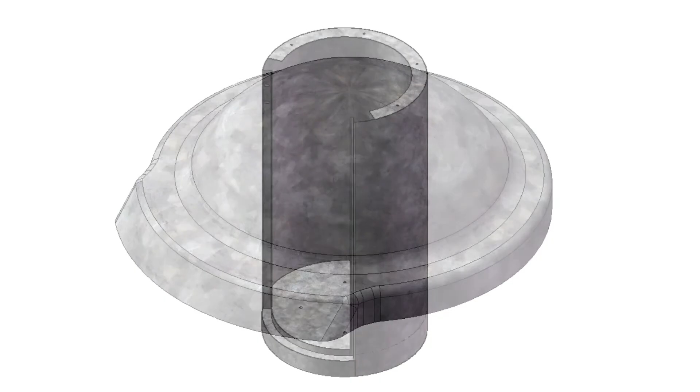They said no. Now they became very rigid. We want round as round. Now we are facing the music. We said, okay, we'll make a round design, and we redesigned using the same materials, better manufacturing, and went back. I'm showing you how we went ahead making the CAD models, the whole structure, the different parts in that, the landings, the door in round shape, the top posting slot in an interesting shape to match the overall configuration of the post box. You can see how we made the base also, now with a rigid structure inside with a round base. We could have had a square base, but we didn't want to take any chances.

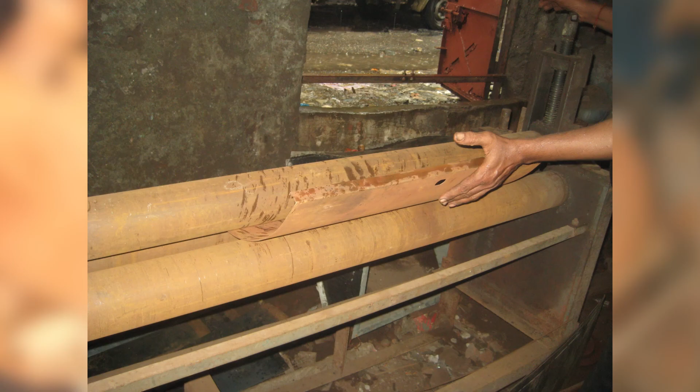And then we suddenly got a call again from Delhi that the Commonwealth Games are happening and there's a large exhibition, and we need to put up this new round box in the exhibition. So from CAD modeling, we had to rush to prototyping. They wanted a single piece. We got all the stuff out. We went to local craftsmen, and look at that sheet that looks rusted, but when it's treated, it becomes shining.

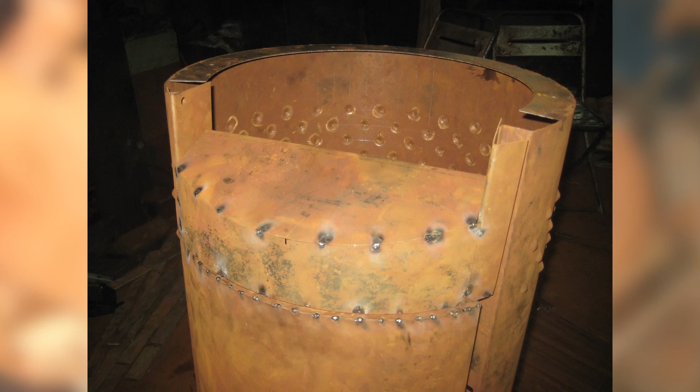So they rolled. That's a rolling machine on which you roll your sheet. Then you do all the fabrication by welding. All the surfaces are welded together. Then you do the painting. We did the painting processes, painted them after treatment so that there's no rusting inside. And then we did the top, the round top. We've learned our lesson.

So we did the hinges, the doors, the details, pretty tough. We had the whole team to work on this. We had experts, we had a team of 10 people working on this at that time. And then we put up one near our main building just for photography. And we sent this prototype to Delhi. They put it up in the exhibition, and the secretaries were very happy, the directors were very happy in India Post.

I said, wow, this is the in thing. And then an interesting thing happens, the secretary also retired. So we were again in a fix. We waited for a long time, 6 months, no result came up. And then a new secretary came who knew our work earlier. So he contacted us and asked me, what's happening to your post box?

I said, my God, this is interesting, let me get back to my old design. So I leapfrogged to my old design. I said, I have the box, there's a problem only with the red color. I just paint it red and it's going to work for you. And I'm going to change the top to a rounded top, marry the old and the new, and it will work. We put the old and the new during the Tech Fest exhibition in IIT.

And then we called this man from Delhi. He came and inaugurated the exhibition. So here we have again the square box, painted red, because there's an advantage of manufacturing in square. You fold very easily rather than rolling. And then we did the tooling.

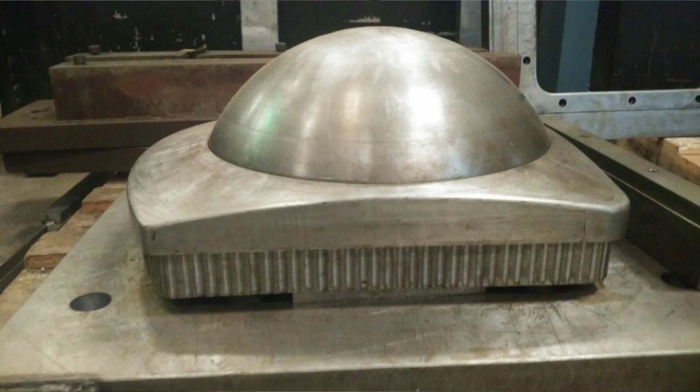So this is the tooling. Now my team from IDC started working. We made a metal die. We did deep drawing. Deep drawing is a process where you have a sheet metal and a large press which presses the sheet metal to get the shapes. All your car bodies are deep drawn. The rounded shapes of your car bodies need large tooling and dies, but this is a very small one for us. So we did these metal tops.

So this is the top. And what is interesting in this top is it's got a feel of the old and the new. The round is from the earlier design and the square is from the new design. And in red color, there was very good recognition. People had no doubt that it was a post box. Which is the best part in design.

So we went ahead in the process. We fabricated the top. We did the deep drawing. We got the sheet metal part out and we painted it. And we were so excited about the whole journey that we published a book on the design. Read through to see the whole story of how the design process went.

So I think it's a good example of crafting where you have engineering strengths coming in, manufacturing strengths coming in, and a lot of innovation from the point of view of contemporary materials, from plastics to metal to stainless steel. So finally, because we are not using the shining property of the stainless steel, and that comes from the costliest part of the stainless steel, which is nickel,

we now have a material which is low nickel stainless steel. And on the low nickel stainless steel, we are doing powder coating. So there's one more protection. So now that is going to work very well. So I thought I'll just show you this total journey, because this reached a stage of pilot production, going back to original concepts, and the to and fro happened nearly 3 times, and still we are waiting for our approval to go into mass scale production.